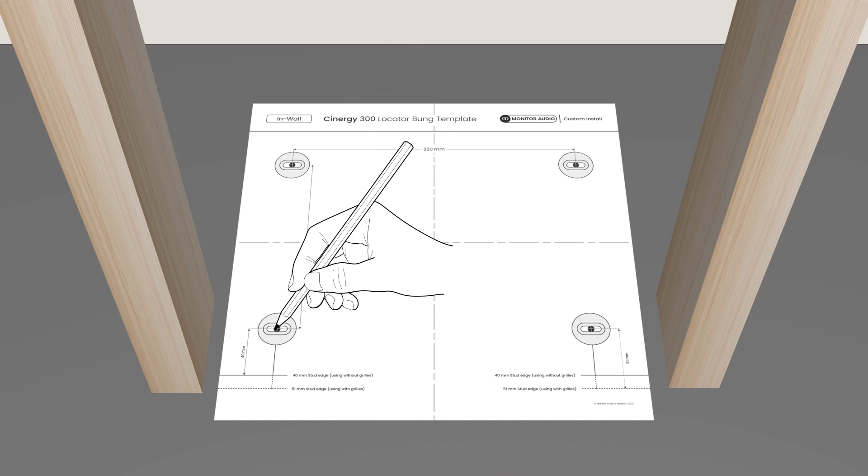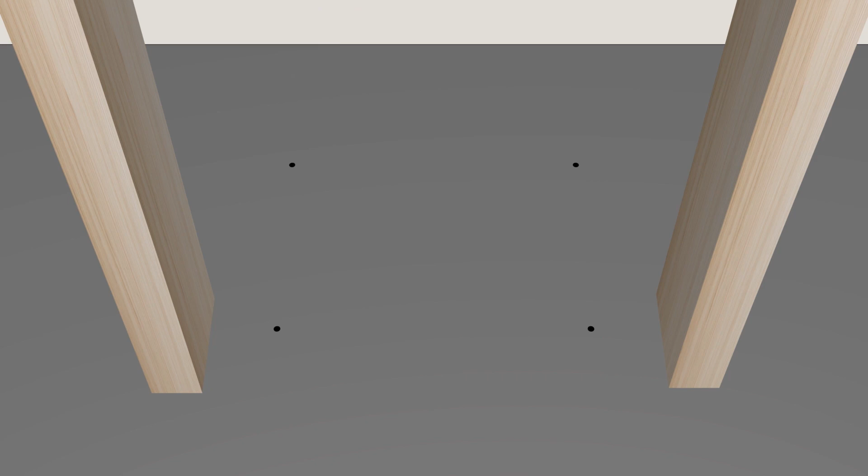The Cinergy range features isolating brackets to prevent vibrations against the stud wall. Using the supplied template, mark the holes on the floor or constructed platform as instructed. Fix the locator bungs to the floor or constructed platform using screws. Fix the isolation feet to the speaker using the supplied bolts.

Optionally, add the isolation pads down the sides of the speaker to further reduce vibrations. Place the speaker into the stud, locating the isolation feet over the bungs. Use the handles in the cabinet to help lift it. Align the brackets with the top of the speaker and the stud to mark a central point. Use this point to drill a pilot hole.

Fix the isolation brackets to the top of the cabinet with the screws and washers provided. Be sure to enable the brackets and movement by not tightening the screws too tight at this stage. Insert the bracket isolator between the stud and the bracket, and use the washers provided and suitable screws to fix to the stud. Tighten your screws going into the speaker cabinet when you're happy with the positioning.

Depending on your wall covering, you can insert port bungs to isolate bass. Optionally, attach the grills provided. For on-floor installations, you'll need to attach the supplied plinth using the 4 bolts supplied.

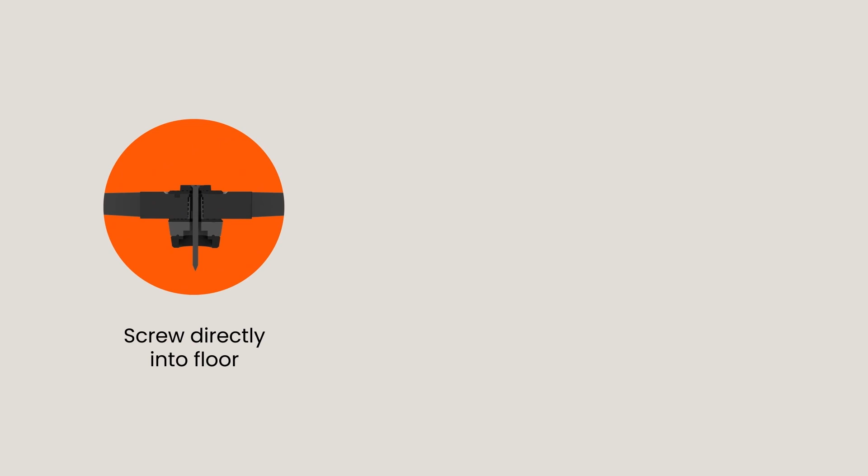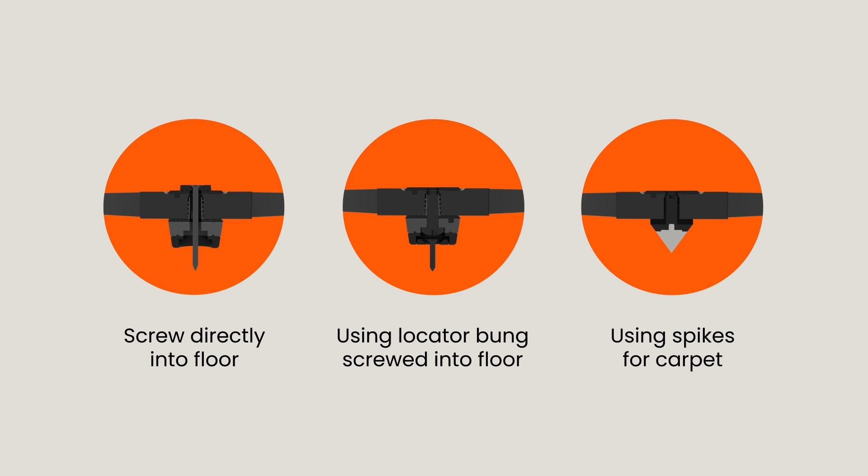You can install Cinergy 300 onto the floor using the isolation feet, either screwed directly into the floor or using the locator bungs provided. Alternatively, spikes are supplied for carpeted floors. For screwing Cinergy 300 directly into the floor, use the supplied template to mark and drill the holes in the floor.

Position Cinergy 300 with the plinth and isolation feet over the pre-drilled holes. Use suitable screws to fix it to the floor.

When installing Cinergy 300 onto the floor using the locator bungs, use the supplied template to mark and drill the holes in the floor.

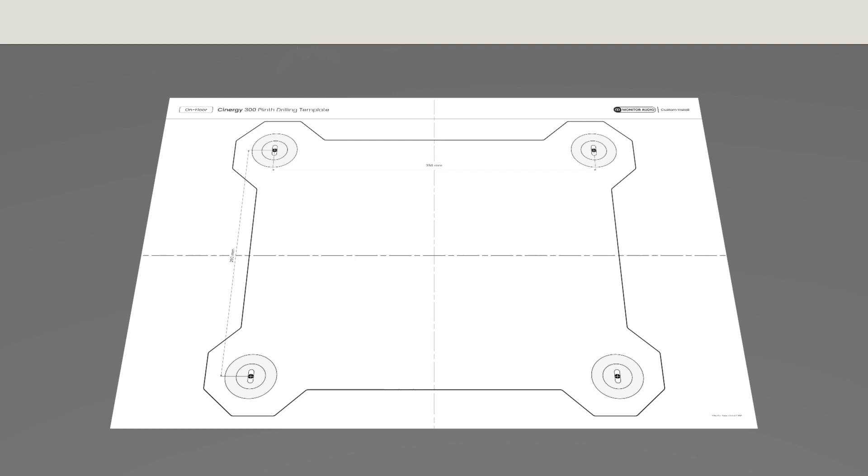Screw the locator bungs into the pre-drilled holes. Use the bolts provided to attach the isolation feet to the plinth. Locate the isolation feet over the bungs.

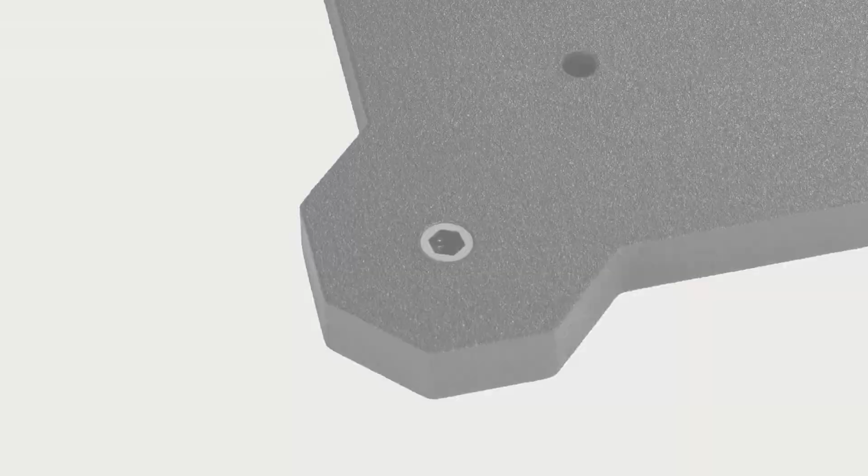If using Cinergy 300 on carpet, install the floor spikes into the plinth and place on the carpet. Optionally, attach the grills provided.